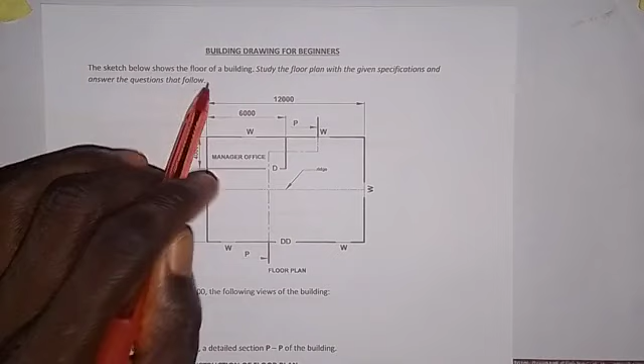What I am going to do now is to teach students who are about to learn building drawing in technical drawing with these simple drawings prepared here. As you can see, building drawing for beginners, and we are going to make use of this simple floor plan to do some things that you are going to be taught in building drawing construction.

The sketch below shows the floor of a building. Study the floor plan with the given specifications and answer the questions that follow. So this is the floor plan, a very simple one. It's a building floor plan that I made myself to make sure that as a student who is about to learn building drawing, you are able to comprehend it with this simple floor plan.

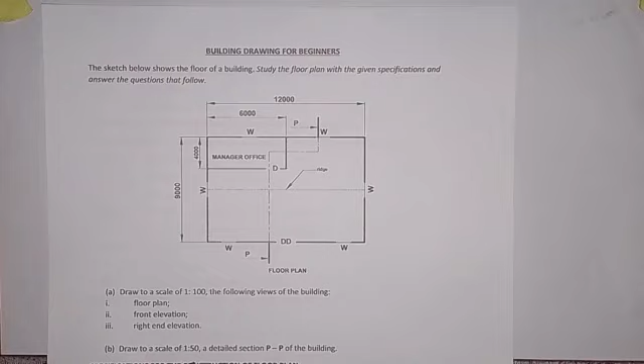Now let's go to the questions we are going to be answering. Here we have question A, which says draw to a scale of 1:100 the following views of the building. Roman figure 1 of question A, we have to draw the floor plan. Roman figure 2, front elevation. Roman figure 3, right end elevation. Then we have question B, which says draw to a scale of 1:50 a detailed section PP of the building.

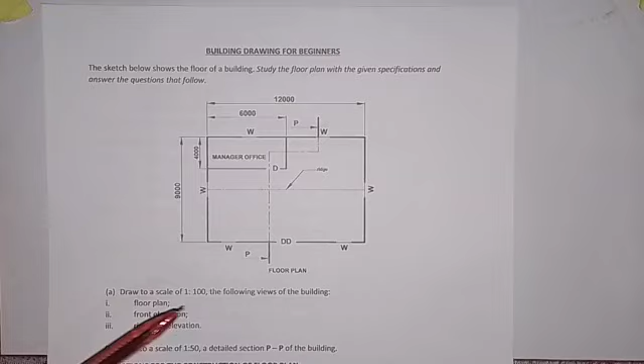We are going to start with the floor plan, and the scale given to us is 1:100. What does that imply? It means that each of the dimensions we have in this drawing, we are going to divide by 100.

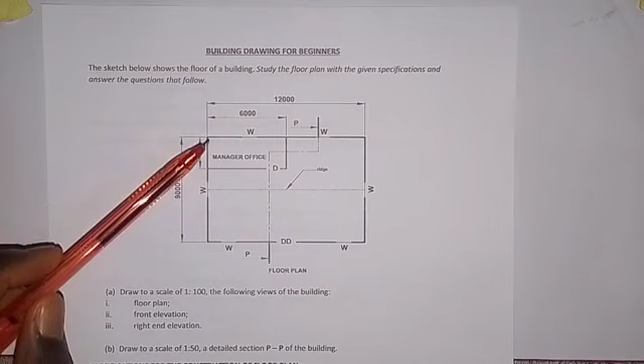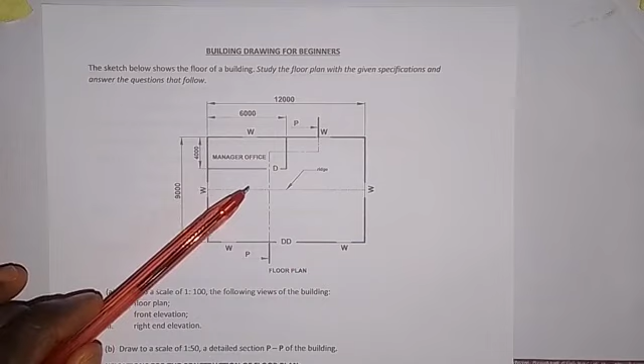If you look at this floor plan, we have it in form of a rectangle, and we have 2 rectangles. For the bigger one, the length is 12,000 and its width is 9,000. For the smaller one, which is the manager's office, the length is 6,000 and the width is 4,000. The W's on the floor plan represent the windows in the building, while the D's represent the doors.

So we are going to start with question Roman figure 1, which is the construction of the floor plan. The first thing we are going to do is replicate these 2 rectangles. That is the first thing we are going to do. Do not skip any part of this video. For you to learn this comprehensively, please don't skip. Just watch, then do your own practice.

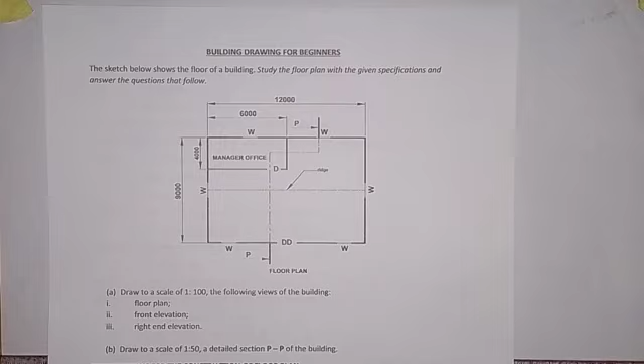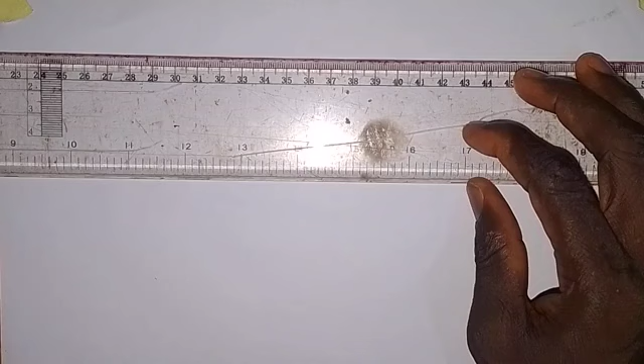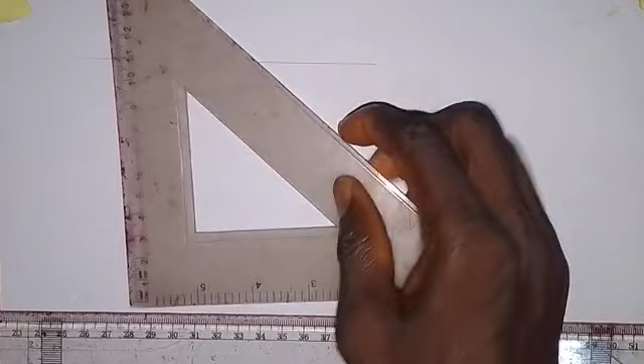Let's go. The first thing we are going to do is draw a horizontal line, so make sure you have space up here and space on this side. We start from here and draw a horizontal line in this direction, just like this. Then we draw a vertical line from this point down here. So we have this vertical line, and now we are going to take measurement.

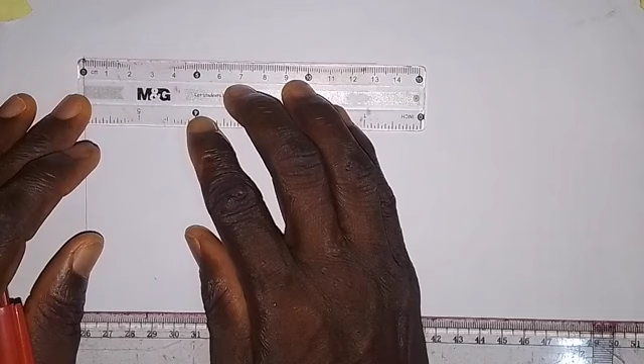The first measurement we take here is 120 millimeters. If we divide 12,000 by 100, as we are using a scale of 1:100, that gives us 120, which is equivalent to 12 centimeters. This is 120 millimeters, and the width of the bigger rectangle is 9,000 millimeters. If we divide that by 100, that gives us 90 millimeters. So here we have 90 millimeters.

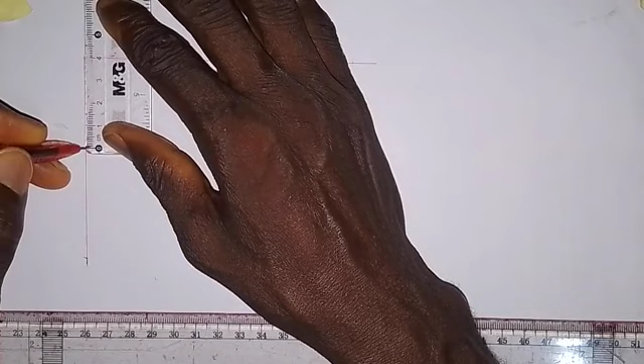For the inner rectangle, the length is 6,000, so 6,000 divided by 100 gives us 60 millimeters. This is 60 millimeters here, and its width is 4,000, so 4,000 divided by 100 gives us 40 millimeters. So we have the length and width of the bigger and the smaller rectangle. Now we draw a horizontal line from this point to this side.

Okay, so I need to make it more visible, so we have it like this, and then we are going to draw a vertical line here.

So coming to this point, we draw a vertical line down from here. Then coming to this point, we draw a short vertical line down a bit. Then from this point where we have 40 millimeters, we draw a horizontal line to touch this. So we have both the bigger and the smaller rectangle in place.

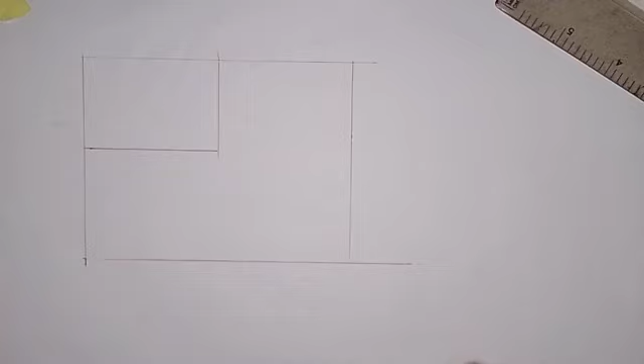So I need to make sure this is closed. Alright, so we have the rectangles in place. So the next thing we are going to do is bring out the thickness of the wall.

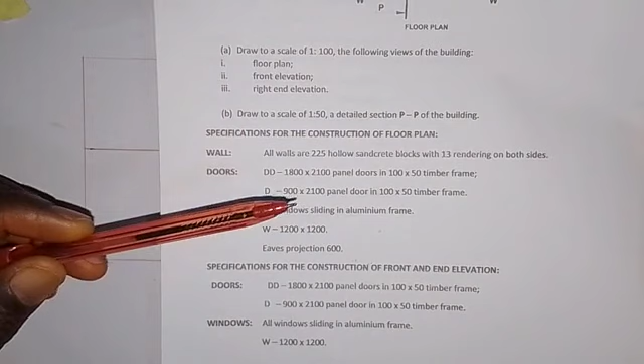So for the thickness of the walls, we go to the specifications. These specifications I broke down based on what we are going to do. The first specification says specifications for the construction of floor plan. So here we have walls, doors, windows, and then the eaves projection.

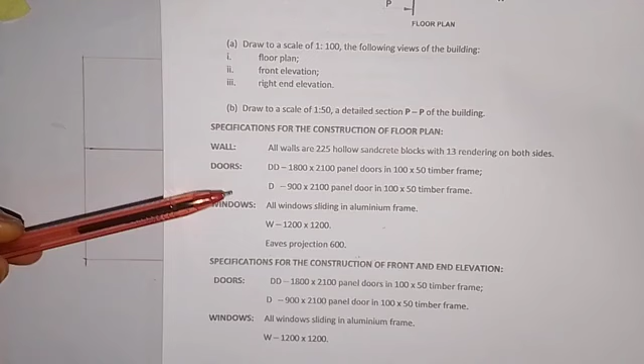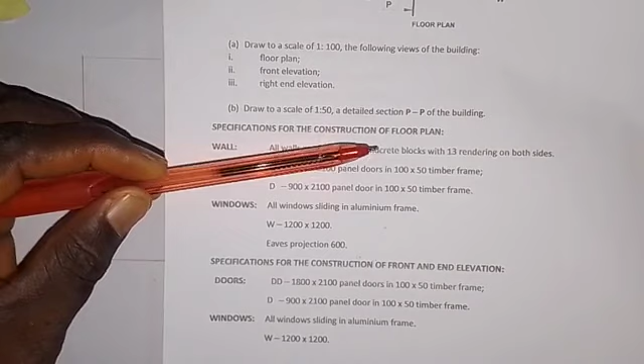Now let's start with the walls because we want to make the wall, we want to create the thickness of the walls. So here we have that all walls are 225 hollow sandcrete blocks with 13 rendering on both sides.

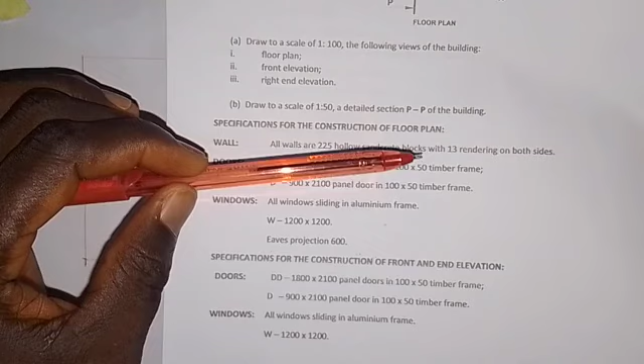So what does that imply? The thickness of the concrete block is 225. Then we have plastering of both the outer and the inner part of the walls, and the thickness of both of them is 13 millimeters.

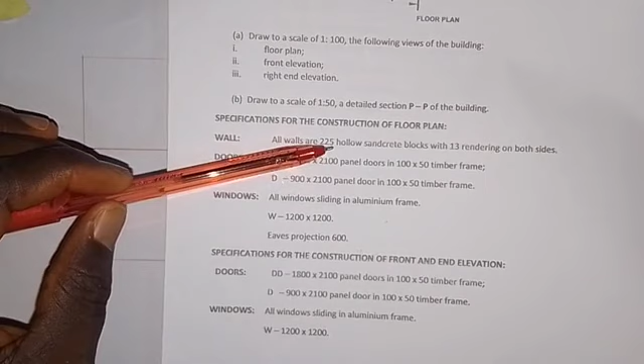So this 13 millimeters we add with the 225 millimeters, and that gives us 238 millimeters. So the 238 millimeters we divide by 100, which is the scale we are given. If we divide 238 by 100, that gives us 2.38, so approximately the thickness of the wall is 2 millimeters.

So what we have to do now is take our ruler, come to this point here, set your ruler like this, and take a measurement of 2 millimeters inward. Before I go on, all these lines that we drew represent the external part of the wall, the external edge or edges of the walls. So that is what we have here initially.

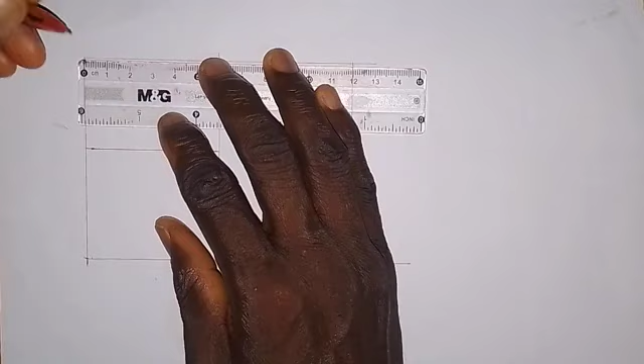So now when we are to make the walls thick, what we have to do is take the measurement of 2 millimeters inside, not outside. Take note of that. So I'll come up here and also take a measurement of 2 millimeters in. So with my ruler, I will join these 2 points together to bring out the thickness of this wall. So it goes like this. We have thickened this wall.

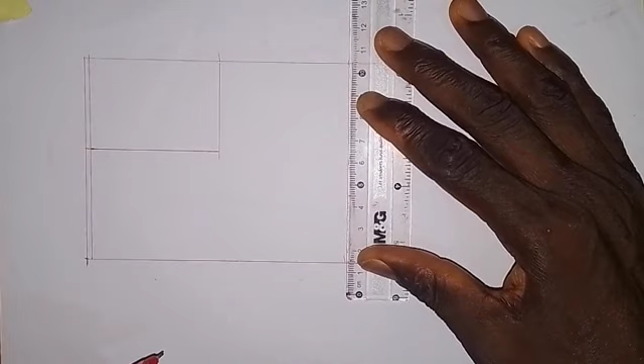Coming to this side, I will do the same thing. I will take 2 millimeters inside. Then coming up here, I will also take 2 millimeters in. So I will join these 2 points together to bring out the thickness of this wall. So here we join this together, and we have this wall thickened.

Then on this side, I will also do the same thing. Take 2 millimeters in. Then coming to this point here, I will also take 2 millimeters. Just take your time and watch this video, and as I'm doing it, please follow me and do your own. We also take 2 millimeters in here. So we join these 2 points together to bring out the thickness of this wall, and we have this wall thickened.

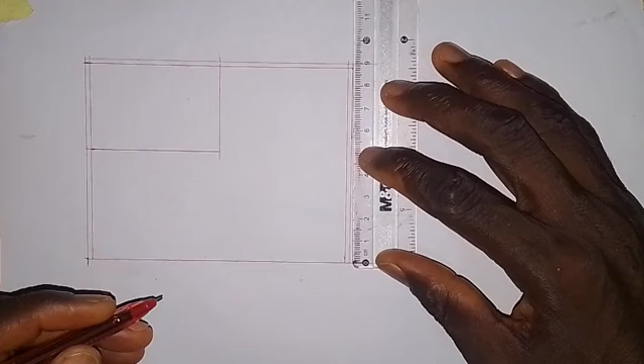Then we do the same thing down here, by taking 2 millimeters inward. Then coming to this end here, we also have 2 millimeters. Then we join these 2 points together to obtain the thickness of this wall. So this is it, we have thickened this wall.

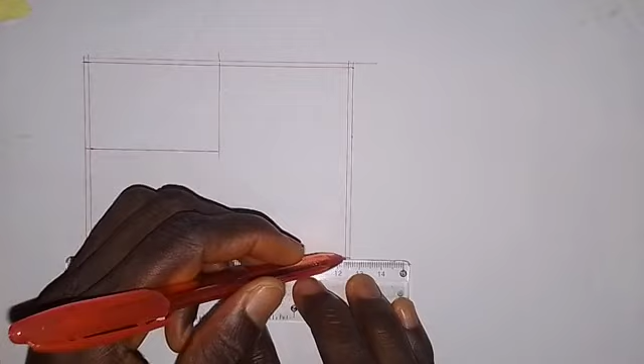So we also have a wall in here. Take it inside 2 millimeters inward. If I come up here, I will also take 2 millimeters like this. Then we join these 2 points together to obtain the thickness of this wall. So this is it.

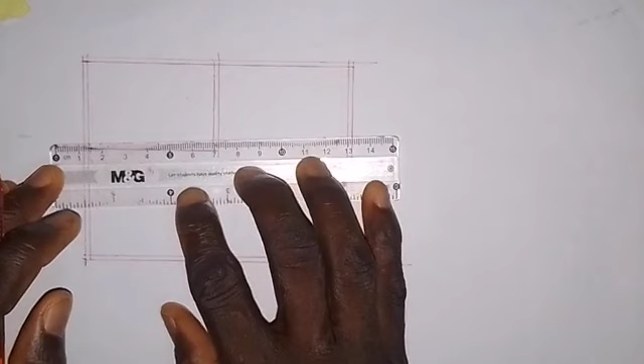Okay, so we have thickened this wall, and we also have another wall here. So here we take 2 millimeters in, this is 2 millimeters. Then coming here, we also take a measurement of 2 millimeters. Then we join these 2 points together to obtain the thickness of this wall. So this is it, from here to here.

Alright, so we have thickened this wall, as simple as I've done it here. So the next thing that we are going to do is to fix the windows.

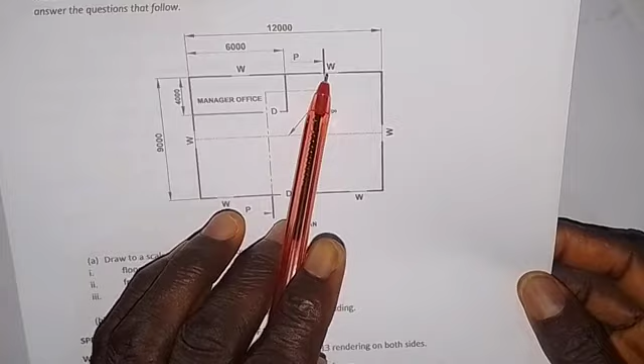Alright, to fix the windows, so we have the windows. So here we have a window here, we have a window here, we have a window here, a window here, and a window here.

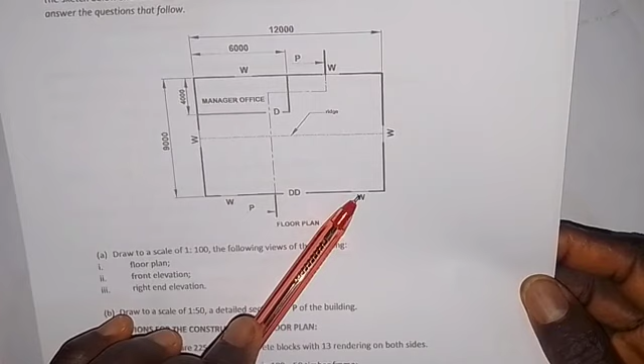So all these windows, this window here is at the center of this distance, 60 millimeters that we have taken in the floor plan. The same thing applies to this, from here to here is also 60, so we also fix it in the middle. So this also is in the middle, this is in the middle of this space, and this also we have it at this point. We have this at this point, so we have to take note of that.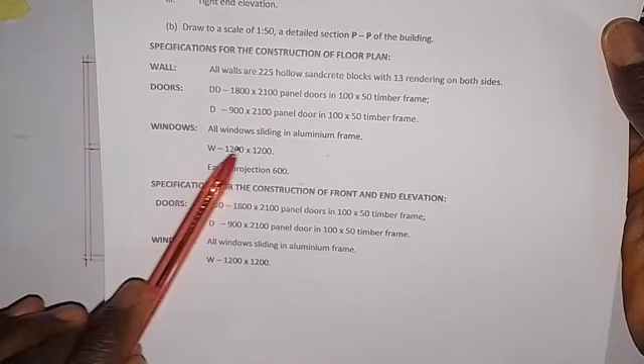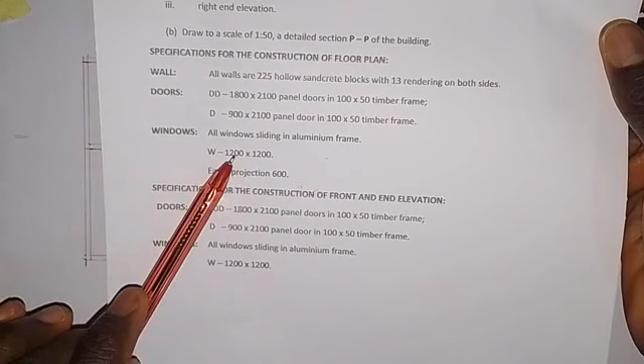But we need to know the details of the windows in the specifications here. So for the specifications, here we have details of the windows. Here we have that all windows are sliding in aluminum frame, so they are sliding windows. And then the dimensions of the windows, as we have W, they are all the same type of windows, so we have 1200 by 1200. So it's in a square form.

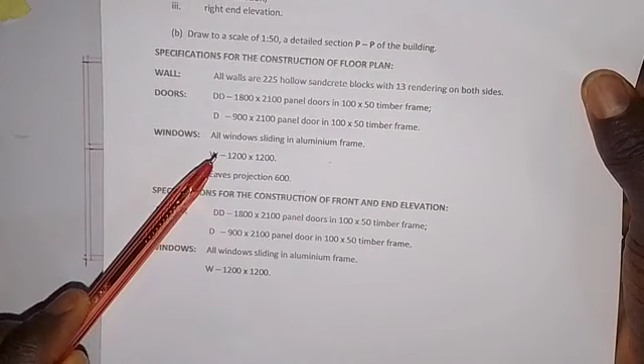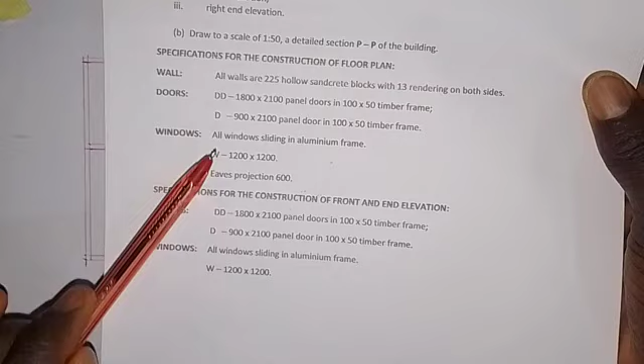Okay, so now we divide. In the plan, we make use of the width of the window. So the width of the window is the first 1200, while the height is also 1200. So here we have the width, we have the height, though they are both 1200, 1200. Sometimes it may be different, but I'm making you know that the first one here is the width of the window. So we divide 1200 by 100, and that will give us 12 millimeters.

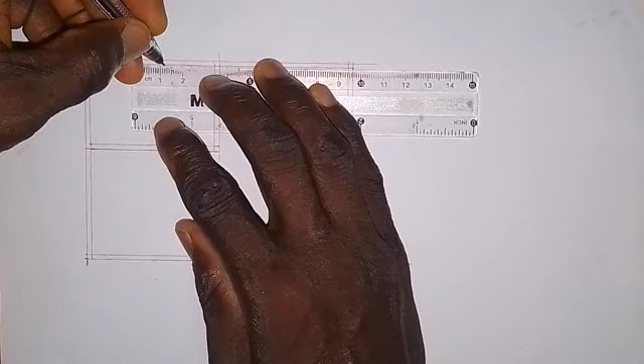So we need to locate the midpoint. You don't have to take a measurement, just look at it this way. For me, this should be the midpoint of this wall, so around here you put a mark here, at 0. Then you take 12 millimeters up, so this is 12 millimeters. Here you draw a line within this wall, draw a line within this wall like this. Then draw 2 straight lines within this space, just draw like this within this space. Come in a bit and draw another line like this. So we have fixed this window.

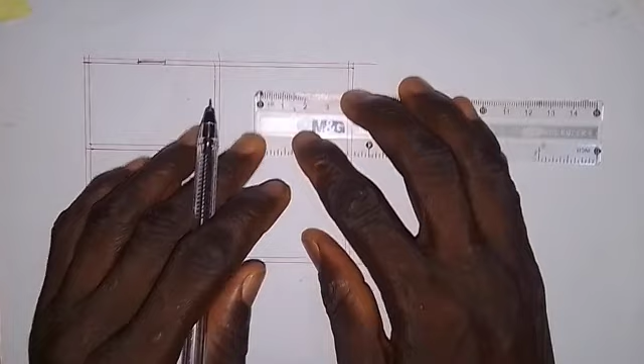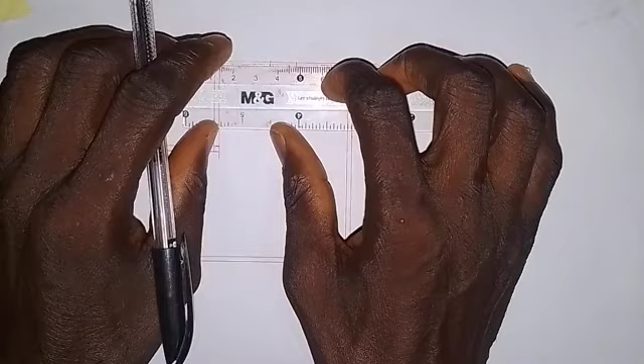Then we have another window here also in the middle of this wall, so around here I put it here. So here we have the first point, and then 12 millimeters up we have the second point. Draw a line within this space, a short line, also draw a line within this space. Then draw 2 lines within this space like this, and you also draw this. Alright, so we have fixed the window there.

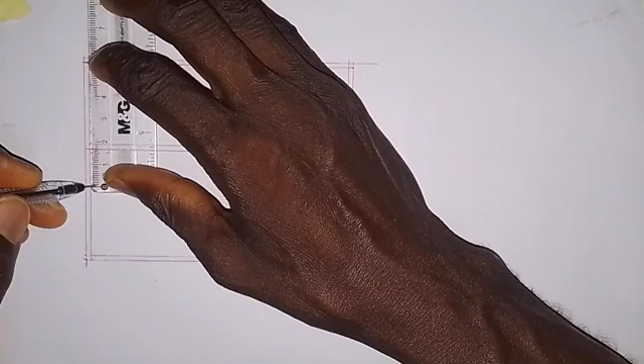So we also have another window here, also around the middle of this wall, around here. So here we have the first point, 12 millimeters up, so here we have this point here. Then draw this line, and then draw this line. Draw 2 lines within this space like this, and then we also have this.

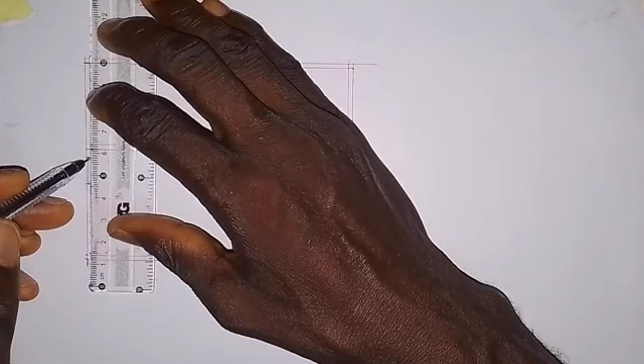Then coming to this side, we also have a window, so within this space, also around the middle of the wall. So here we have this point, 12 millimeters up, so we have this point here. Draw this line, and then draw this, then we draw 2 lines within this space like this.

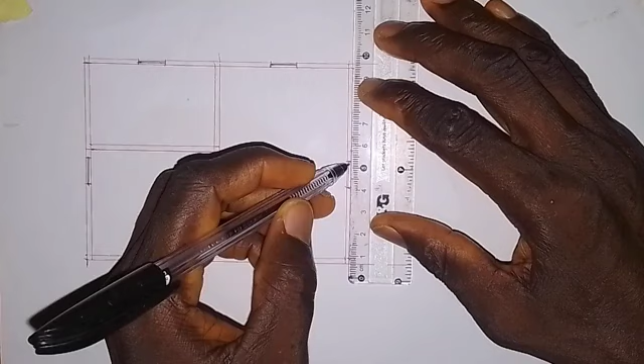Alright, so we have fixed this window. Then we also have a window around here. So if you look at the floor plan, we have a window very close to this wall, and we also have a window very close to this wall. So take note of this.

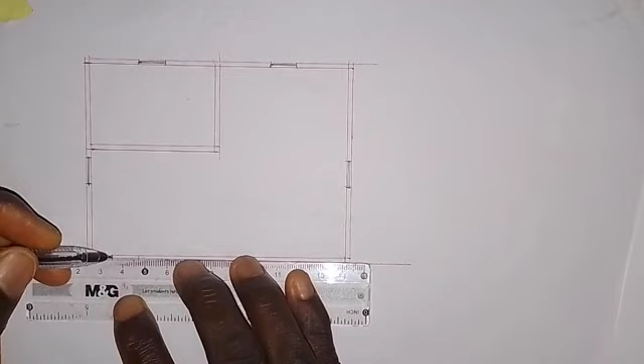Okay, so I'll come around here and mark this point. Then take 12 millimeters. So draw a short line at this point within this space, and a short line within this other space. So draw 2 horizontal lines within this space. Okay, so we have fixed this window also.

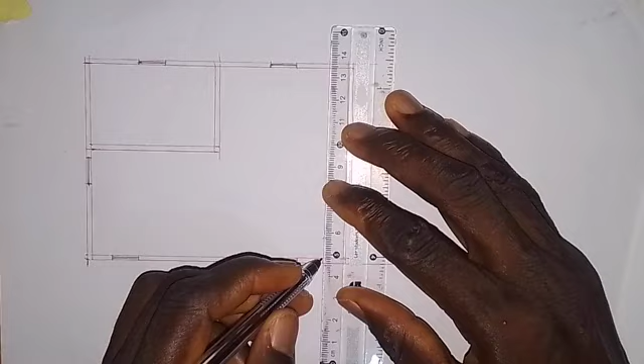Then coming here, we also take 12 millimeters, move away a bit. So this point, here, and 12 millimeters up. So we fix this door, this window within this space, and then draw two lines. Within this space. So this is how we represent the windows within the walls of a building in the plan. So we have fixed all the windows.

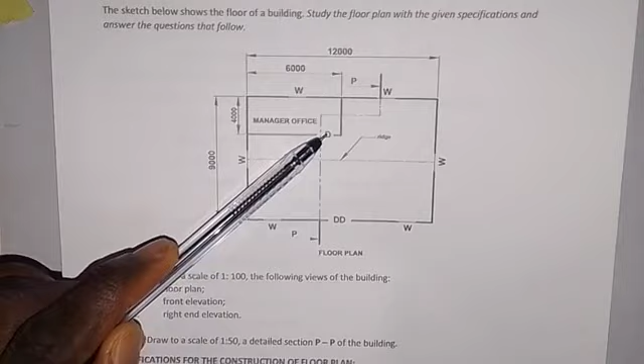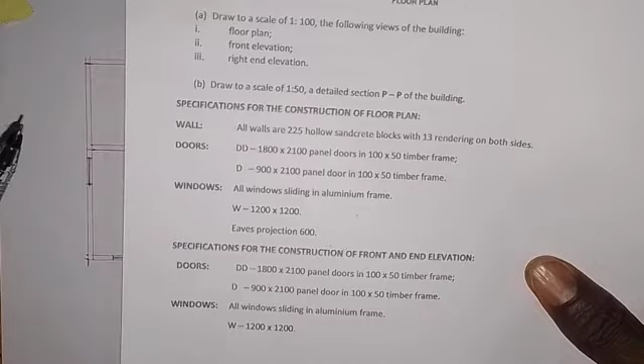So the next thing we are going to do is fix the doors. To fix the doors, we need to look at where they are. So here we have a single door, marked D, meaning a single door here. And here we have DD, meaning double doors. So now we need to go into the specifications to know the details of the doors.

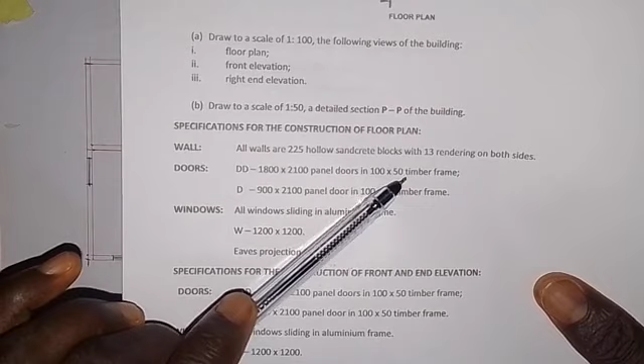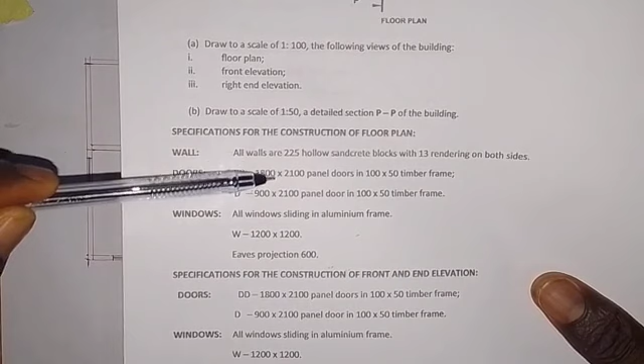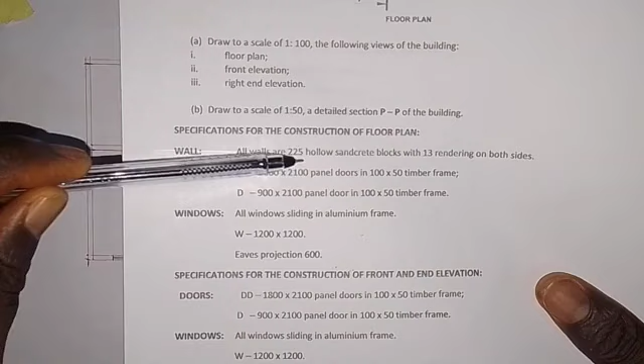So here for DD, we have 1800 by 2100 panel doors in 100 by 50 timber frame. Then for D, 900 by 2100 panel door in 100 by 50 timber frame. Let's talk about DD first: 1800 is the width of the two doors, so each door's width is 900, and the height is 2100. For D, the width is 900, and the height is also 2100. Take note of that.

So let's go and fix the door. Don't forget we have one door into the manager's office, and this double door into the building, which is an entrance door. So let's look at how we are to fix it, starting with the one for the manager's office.

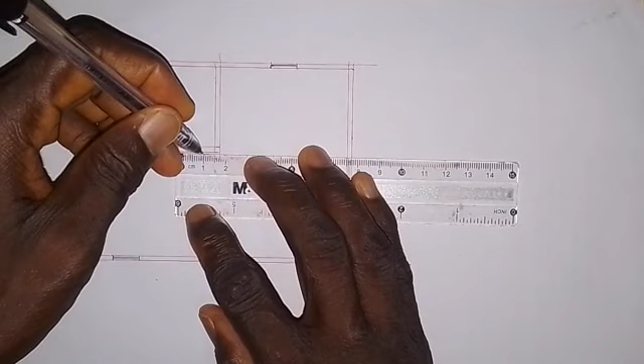So what you have to do is move away a little bit from this wall, as we see in that drawing. Put a mark here, and take 9 millimeters away from here. So this is 9 millimeters. Make a line here like this, and then make a line here like this.

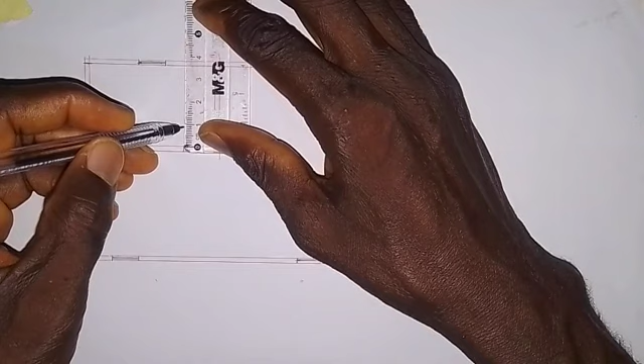So the next thing is we come up here like this and draw a vertical line 9 millimeters up, joining it together with this. So 9 millimeters up gives us this line. Then join these 2 points together, this point on this line and this point on this line, joining them like this. So we have fixed this door.

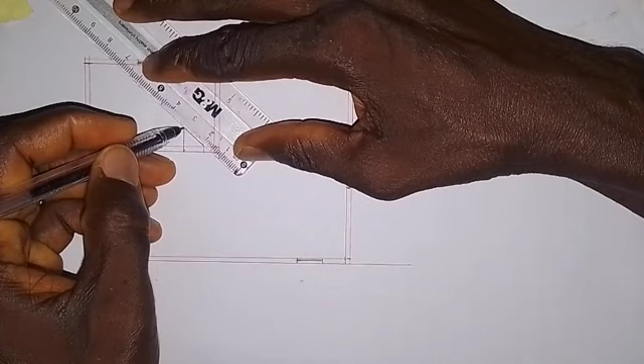So when we open this door, it will lay on this wall. This line represents the door itself. So when we open it, it will lay on this wall. That is what we have there.

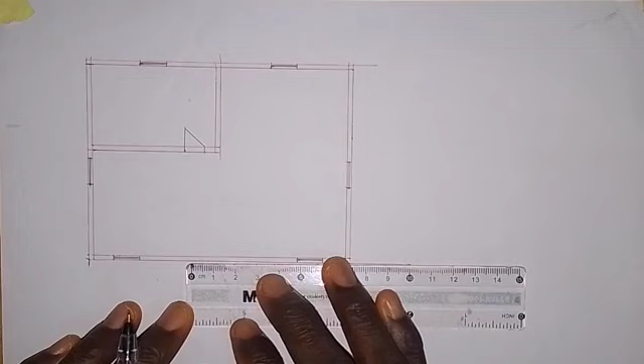Now for the entrance door, we have the 2 doors within this space, in the middle. So all I have to do is put a mark here like this, take 9 millimeters to this side, and 9 millimeters to this side. Then I'm going to draw a line here, and also draw a line here, and make this line as well.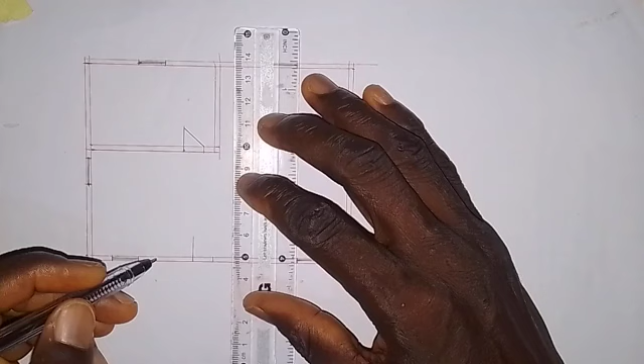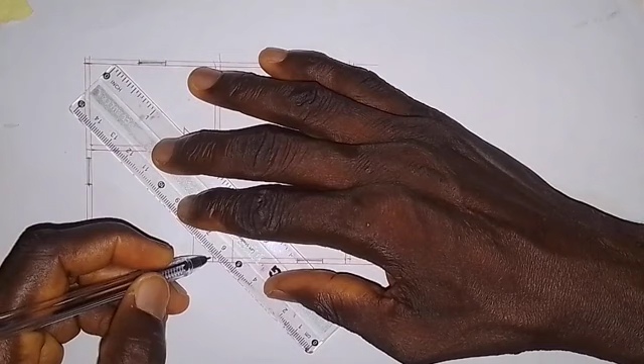Then at this point, I'm going to draw a vertical line 9 millimeters up here like this. And coming to this side also, I will draw a vertical line 9 millimeters up, going up like this. Then I'm going to join these 2 points together, and also join these other 2 points together.

Alright, so we have fixed the entrance doors as we see it here, as simple as we have it. So the next thing we have to do is to thicken the walls. So what do I mean by thickening the walls? The lines of the walls, we have to make them thick.

I will make this line a thick line, like this. I will also make this a thick line so we can see the wall's edge clearly. So coming here, from this point to this point, do not close one of the doors, that must be left open. Make this one a thick line, and from here to this end, make this a thick line also.

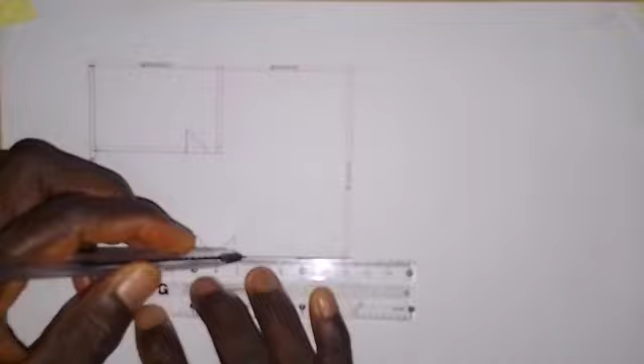So we come up here and also make this a thick line. Okay, so we also make this a thick line. So that is what we have there. I will pause the video and do the rest.

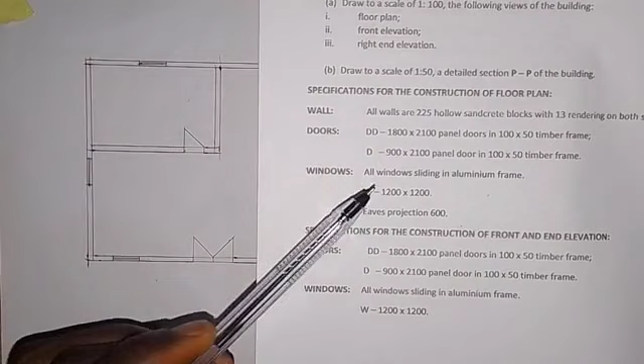Alright, all the walls have been thickened. The next thing we are going to do is to draw Eaves projection around this floor plan. What is Eaves projection? So let's look at it. In the specifications for the floor plan, we have that Eaves projection is 600.

So Eaves projection is the distance between the external wall of the building and the end of the ceiling. If you look at the external wall of the building where you live, and the ceiling outside, you see that there is a distance between them. That distance is what we call Eaves projection. So how do we make that Eaves projection around this floor plan?

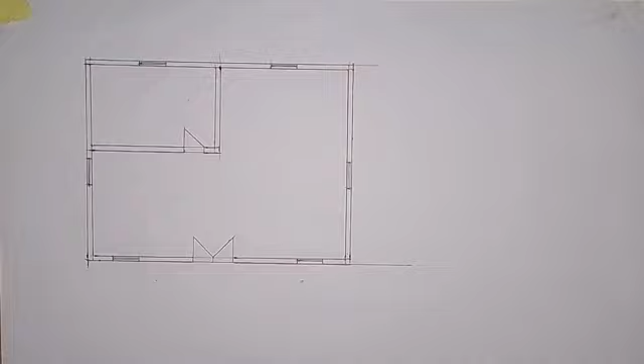What we have to do is extend this horizontal line to this side, and then I will also extend this horizontal line to this side. This one is already extended as we have it here. So the next thing I'm going to do is extend this vertical line.

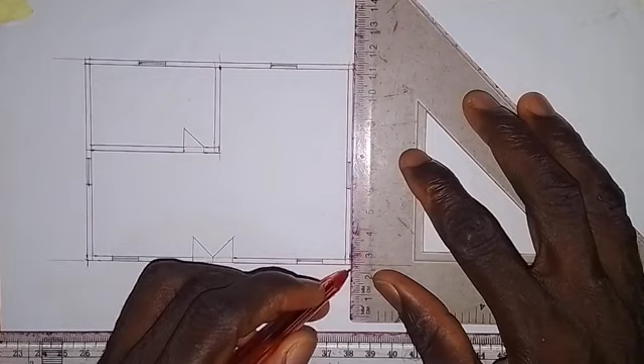I will extend this vertical line, taking it down a bit, and also up a little bit here. Then coming to this side, I will do the same thing by extending this vertical line a little bit, and extend this up a little bit like this. Okay, so we have this.

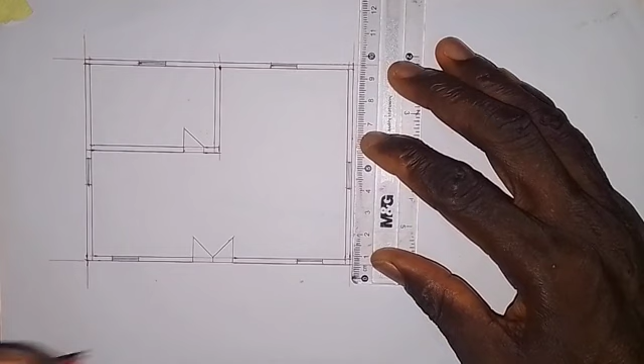So the next thing I'm going to do is take a measurement. I will take a measurement of 6 millimeters down on this vertical line. So 6 millimeters down, and I will also take 6 millimeters up here. So this is 6 millimeters here.

So then on this side, I will take 6 millimeters from this point outward. This is 6 millimeters. On this side also I will do the same thing, taking a measurement of 6 millimeters out. So this is 6 millimeters.

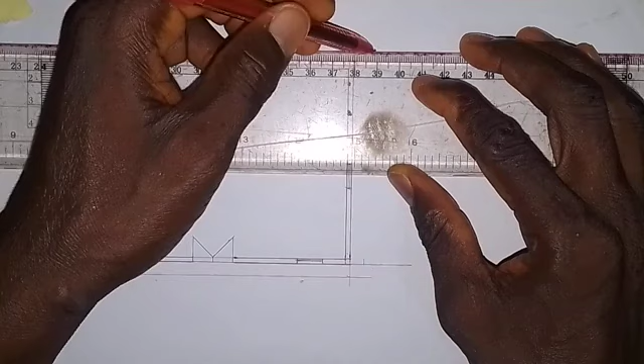So what I'm going to do now is draw a horizontal line from here, like this. Okay, so we have this. Coming up here, I will also take a measurement and draw a horizontal line from here to here. Then, taking my set square, I will draw a vertical line like this.

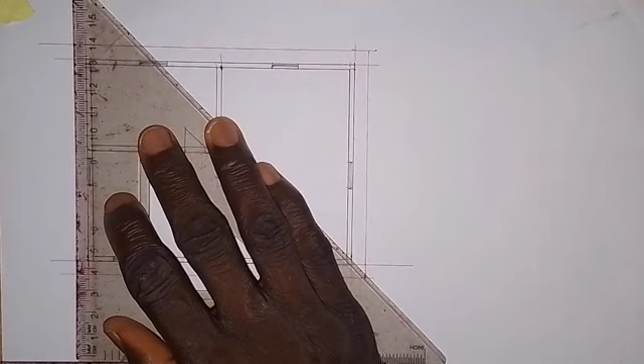So then I'll come to this side and draw a vertical line through this point, going up like this. Okay, so that is not the final thing we have to do.

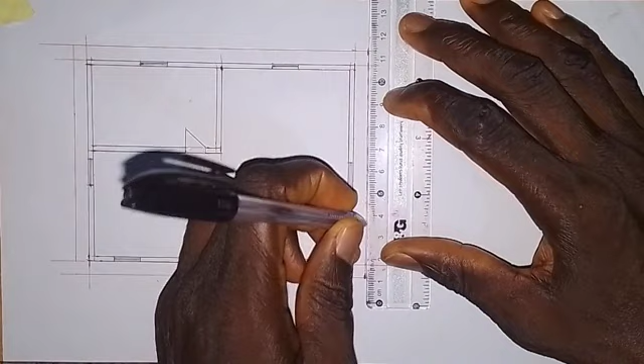This projection is represented with a short dashes line, so we produce a short dashes line here like this, just dash, dash, dash, dash. Alright, so we have this. I'm going to do the rest while I pause the video.

Alright, so we have completed the Eaves projection, and then we need to write what this place is meant for, which is the manager's office. So write the floor plan and the scale used, which is 1:100. For now, we have completed this construction of the floor plan. It's as simple as that, as I've done it here.